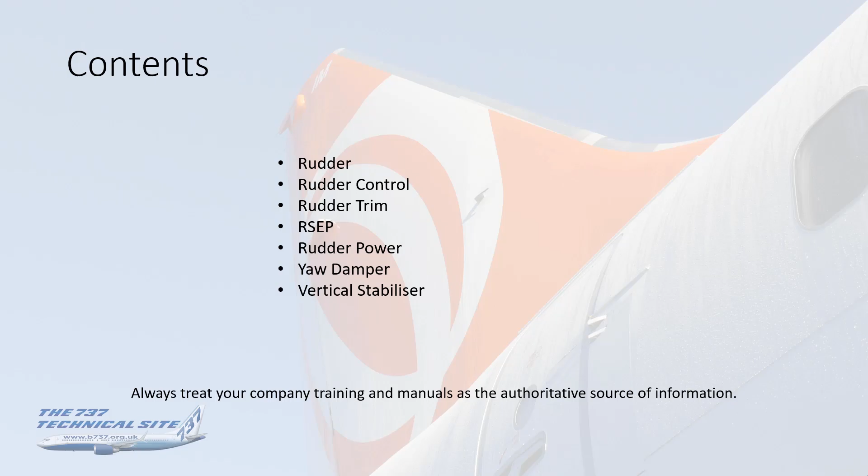Starting with the rudder. It's got a maximum physical deflection of 29 degrees left or right of centre. It was only 26 degrees on the Classics, but it was increased slightly for the NG, as it was envisioned, and in fact it happened, that the aircraft were going to be made with a longer fuselage length, the 8 and 900.

So the extra rudder deflection was sort of future-proofed in for them. Although that maximum deflection is 29 degrees, the total authority of the rudder is reduced with indicated airspeed due to something called blowdown, meaning although a constant hydraulic pressure is applied to the surface by the actuator. The movement of the panel reduces with speed as the dynamic pressure on it increases. For Classics, which are the only generation I've got data for, but it's very similar to the NG and the Max I'm sure, the figures for total travel are as given there.

Whilst the aircraft's stationary, it's the full 26 degrees. At 150 knots, it reduces to 19 degrees. At 250 knots, 8, and at VMO 340 knots, it's down to just 4 degrees.

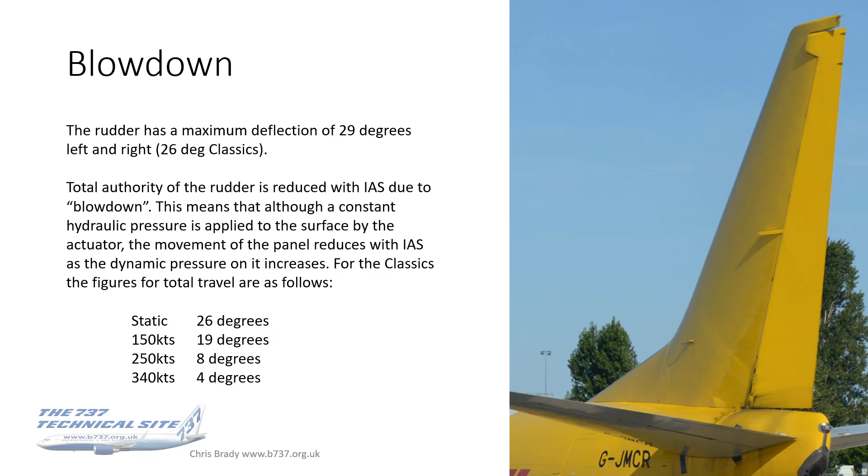Tabs. I've put this in - it's not really a trick. It's more to make the point that unlike the ailerons and elevator, the rudder does not have any balance or servo tabs, because it is, or at least always should be, always hydraulically powered due to the level of hydraulic redundancy on the rudder system. For the same reason, there is no manual reversion in the cable and direct linkage sense of the word for the rudder.

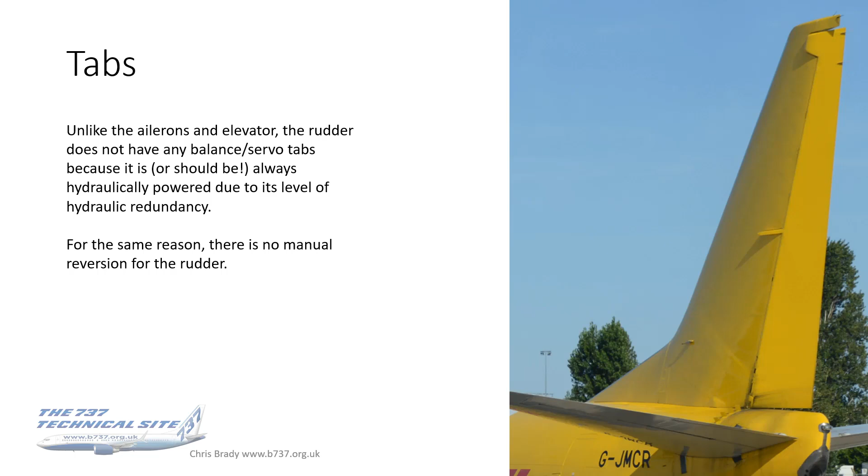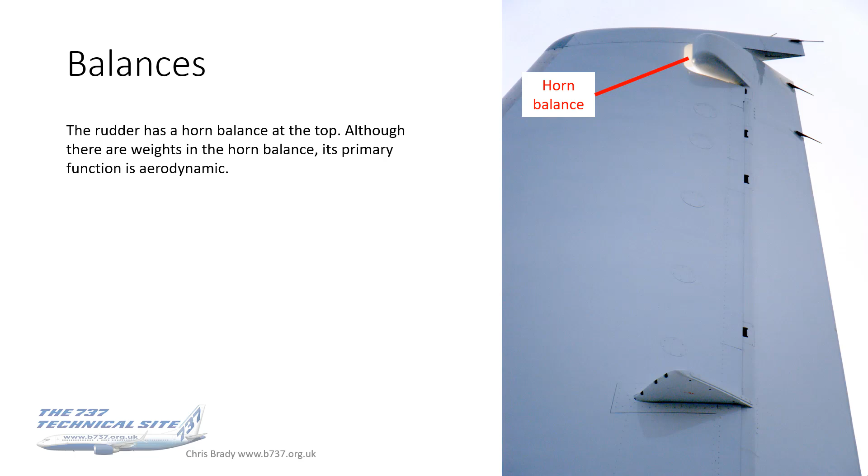So looking toward the top of the rudder here, let's have a look at the balancers. The balance on the top is a horn balance, and although there are weights in that, its primary function is aerodynamic, so the shape of that assists with the deflection of the rudder. But the rudder's also got mass balancers forward of the hinge line, and you can see one down near the bottom of the photograph.

The weights in the mass balancers are made of tungsten, not depleted uranium. That was something that was used by Boeing, most notably in the very early 747s, because of its density. That was quickly swapped out for tungsten, which is almost as dense, but without the radioactive side effects.

The weights in the mass balance are adjustable for rebalancing, unlike the weights in the horn balance, which are permanently set as they come out of the factory. The reason why rebalancing may be required is after a repair or a repaint, not only of the rudder but any primary flight control, and that's to prevent flutter or any dynamic instability.

Hopefully the reason will just be a repaint rather than damage, but it could be for either. Most of the time rebalancing isn't required - it depends on the actual paint job, or the nature of the repair on the surface, and the engineers will do a calculation to verify that rebalancing with weights is not required. The last thing to say is those little holes visible at the front of the mass balancers are just drain holes, to let the water out.

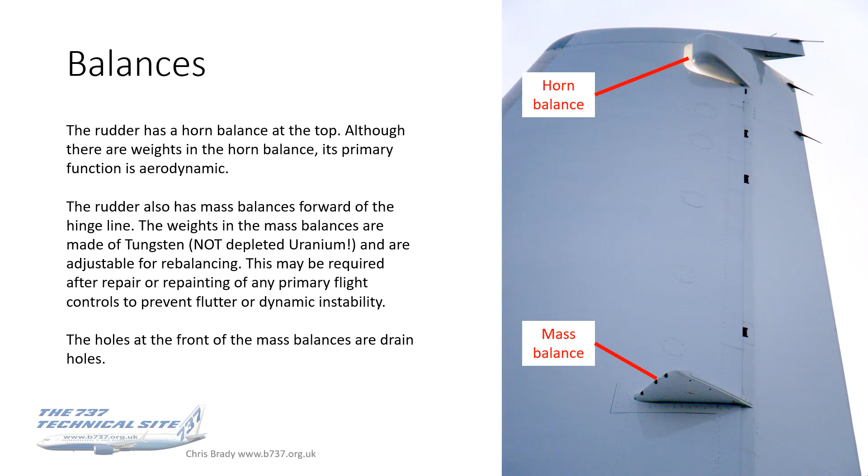One other thing about mass balancers is on the 737-1 and 200 series, they can actually be used to age the aircraft. The first 737s off the line had three mass balancers, as you can see in the right-hand photo there. That was until 1970 when they dropped down to two mass balancers, which apparently saved 40 pounds in weight.

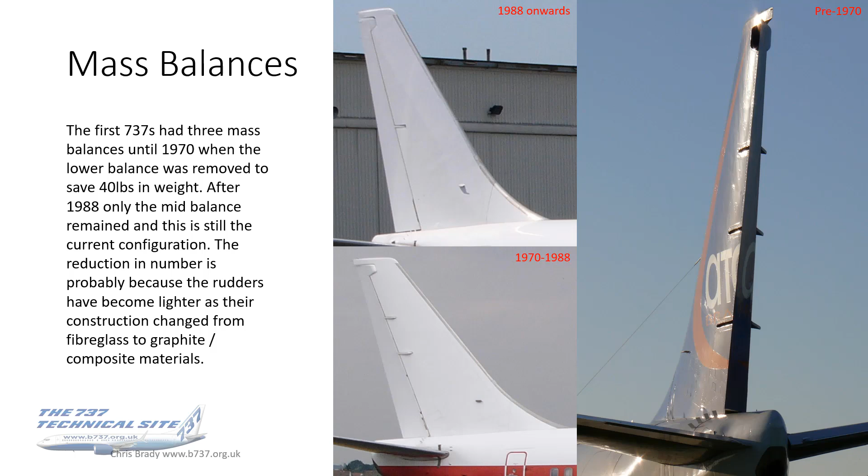And then in 1988, they managed to eliminate the upper mass balance as well, just leaving one mass balance in the centre of the rudder. That's still the current configuration in all 737s today, right the way through to the MAX. So all the evolution was done in the 1 and 200 series. The reduction in number of mass balances was probably because rudders have become lighter as the construction changed from fiberglass to graphite and composite materials.

On to rudder control. There's quite a complex photograph there on the right, I'll come back to that in a minute. Let me explain what we mean by rudder control. The rudder is hydraulically powered by PCUs located in the vertical stabiliser in the tail. But the inputs come from us in the front via the rudder pedals. So that input has to get from the rudder pedals at the nose of the aircraft, all the way through the length of the aircraft, up the fin to the PCUs. How is that achieved? Well, in true Boeing style, it's done with push rods, cables, quadrants, and other suitable mechanical devices.

Onto the photo. This photo is taken under the flight deck floor, in particular under the FO seat, and the top of the photo is looking forward toward the nose cone. If I put some labels on it, it might help a little, because I agree this is quite a difficult photo to work out, but it was the best I could do.

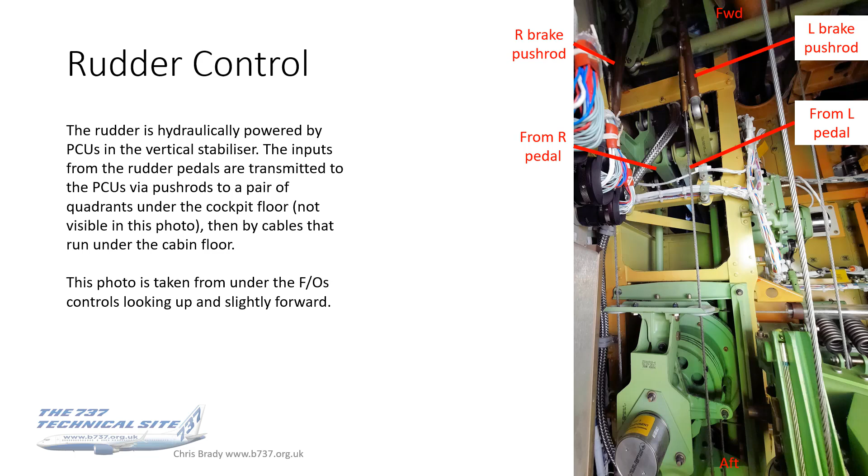The two rods going forwards from those pedal linkages are actually the brake push rods, because these are from the toe brakes. When you push forward on the rudder pedals, they're the connections that go through to the braking system. I could have included that photo in the landing gear video, but anyway, there it is. You've seen it now.

So returning to the rudder, these are the push rods for rudder control. They are travelling aft from the left and right rudder pedals, so there's a push rod from each. You can't see the one from the right pedal particularly well, but the left one you can see more of the length of it.

Just to show you some other things while we've got the photo up, that silver braided cable that runs almost the full length of the photo is the rudder pedal adjustment flex shaft. When you're adjusting the length of the rudder pedals with that knob just above them, that's where that runs, but from behind that adjustment knob. The other thing I should mention is that large cylindrical unit at the bottom of the photograph - that's actually the base, the underside of the first officer's control column. So there you go, that's a kind of overview of what lies beneath the flight deck floor.

The takeaway point from this is that from the left and right pedals, you've got a push rod from each that goes back, and they will meet a quadrant. On the quadrant is where the start of a cable run occurs, and it's the cables that travel the length of the aircraft, not push rods.

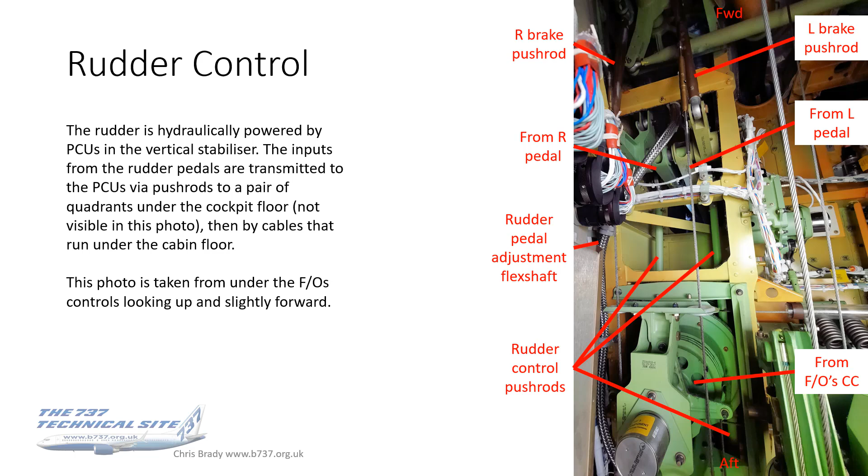So this photo, again, was actually taken on a Classic, but it's exactly the same on the NG and the Max. This shows a section of the cabin floor taken up, and you can see that there are, in this photo, actually 5 pairs. There are 10 cables visible, and I can tell you, if more sections of the floorboards further outboard were taken up, there would be even more cables.

Anyway, the rudder cables, the ones that we're interested in, they're actually the inner 2. I know this because when I was taking the photo, I had my colleague in the flight deck, and I had him moving all the flight controls while I was holding these cables to try and identify which did what. It was actually a longer job than it should have been, but I promise you, those inner 2 are the rudder pedal cables, and they travel all the way down the fuselage, then travel back to be behind the aft pressure bulkhead, where they turn upwards into the vertical stab up to the PCUs.

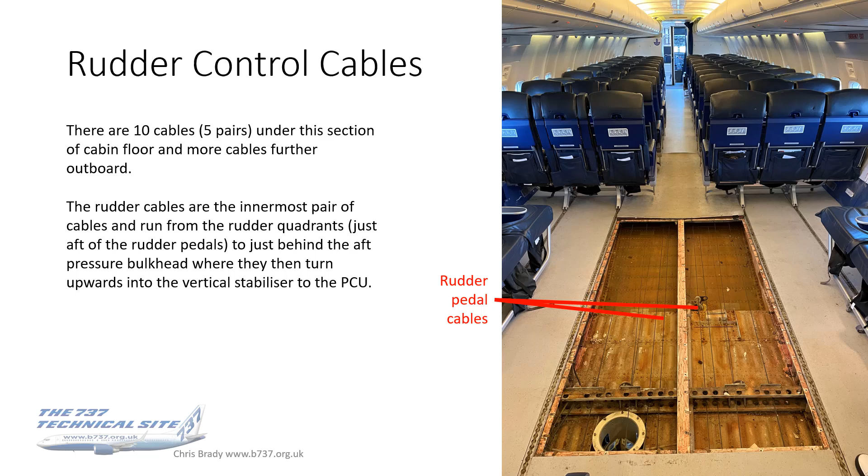Anyway, I have some more photos to show you of this journey. This is the absolute back part of the cabin floor, and at the top of the photograph you can just see the start of the rear pressure bulkhead. So there's nowhere further you can go back on the plane in the cabin than here. I agree it's difficult to see in the photos, but hopefully you can just about see that there are actually 4 cables visible in this, and the inner 2 again are the rudder control cables.

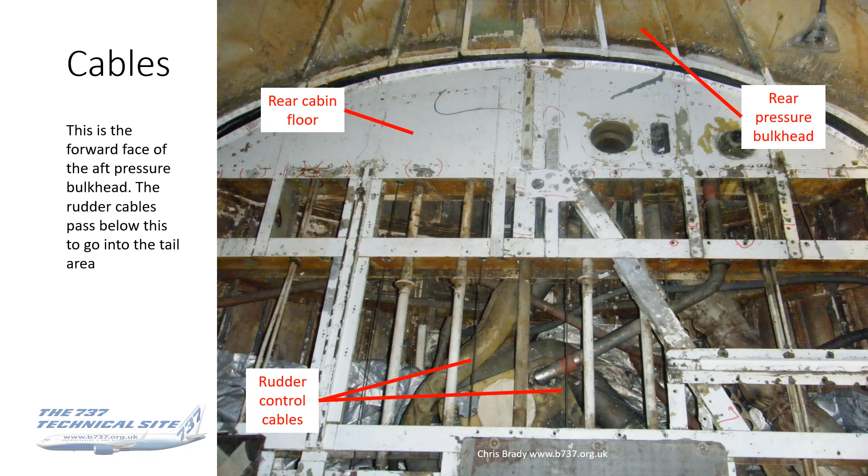So the other side of the bulkhead looks like that, which I think is a great photo. To me, this looks like the bottom end of a Saturn V rocket, but it is sadly only the back of the aft pressure bulkhead on a 737.

Now you can see there are 2 cables travelling vertically up. They're the 2 that we saw in the previous photo, and they're turned upwards by a pair of pulleys. They then go up along the back of the aft pressure bulkhead, and you can see 2 more pulleys which just turn them off at about 30 degrees, just to follow the inside route up the vertical stab.

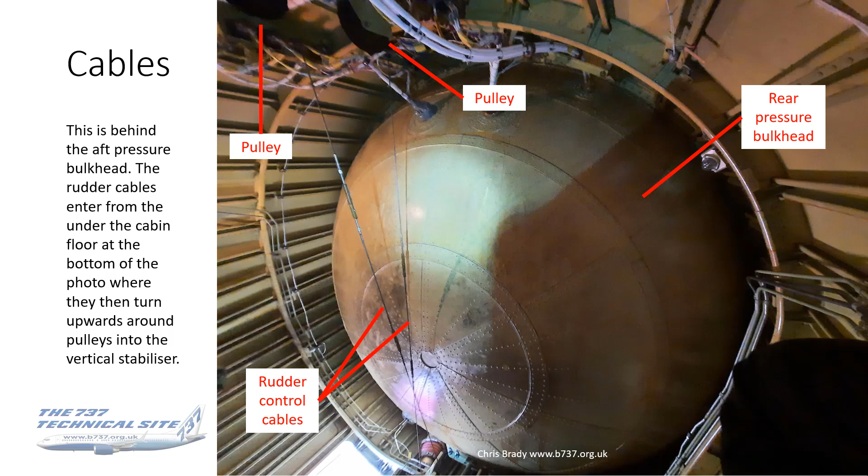And then this is a view of the side of the fin. The forward is looking to the left of the photo. So if I take you through the labelling of these items from left to right, that's probably most logical. On the left, you can see I've labelled the cables from the rudder pedals. These are travelling up from behind that aft pressure bulkhead, as we saw in the previous photo. They then turn a corner and travel down toward the centre of the stab, where they meet the aft rudder quadrant.

So the forward rudder quadrant was just a couple of foot behind the rudder pedals, and these cables terminate at the aft rudder quadrant. Now also attached to the other side of the quadrant are 2 more control rods. These are output rods, and they marry with, or go into, the feel and centering unit, which is connected to the torque tube, and the torque tube rotates and gives the inputs via another pair of control rods to the standby main PCUs.

So really, from the feel and centering unit, the torque tube, and the PCUs, it's actually very, very similar to the system that I showed you on the previous video with the ailerons. It's unfortunately just not anything like as easy for me to show you the photos of how it works behind the panels with the rudder, because it's so inaccessible. As you can tell by the quality of this photo, I took this 10-15 years ago from a distance, and it's the best photo I have in my library. But the function of that feel and centering unit, the torque tube, and the PCUs is just the same as you saw me able to show you in the wheel well for the aileron system.

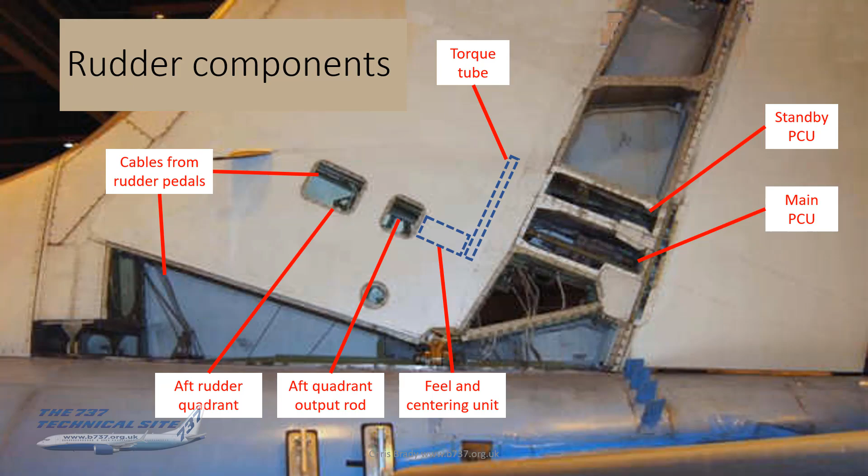This is the only decent photo I've ever managed to take of the PCU. It's the other side, unfortunately, so it's the less interesting side. If a PCU can ever be described as having an interesting or least interesting side, but there you go. So it's the side without the control rod inputs, unfortunately.

But what you can see on this side, up at the right of the photo, are the 4 hydraulic lines - your hydraulics A and B flow and return lines, which confirms that this is the main rudder PCU and not the standby rudder PCU, because the standby rudder PCU has just got a standby hydraulic system feed, so it would only have two feed lines, or 1 flow and return. The actual main housing of the PCU is there in the middle, and you can just about see on the left hand side the piston rod which is attached to the rudder, which is just out of shot to the left of the picture.

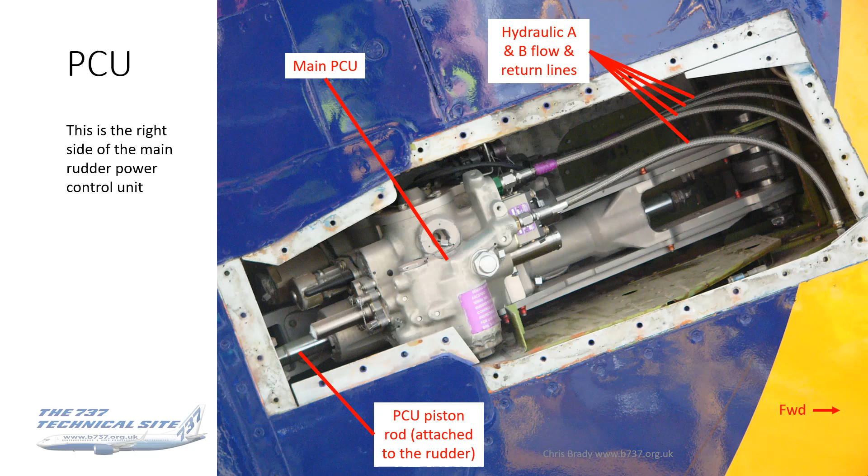Okay, on to rudder trim. Now, if we go back to the photo I showed you a couple of slides ago, this is probably the best way to visualize it. Now, the rudder trim sends an electrical signal to the rudder trim actuator, so it's not done by cables at all - it's an electrical wire. That moves the rudder trim actuator.

Again, it's virtually identical to the same rudder trim actuator that you saw in the wheel well, where you saw it in action in the video I did, where it moves and biases the feel and centering unit. In doing that it's connected to and turns the torque tube, which puts an input into the rudder PCUs, which moves the rudder. So that's how that works.

Now the other thing is, because the feel and centering unit is also connected by the control rods to the aft rudder quadrant, and in turn the cables, and in turn the rudder pedals, this actually back drives the rudder pedals through the rudder cable system. That is why when you move the rudder trim knob, the rudder pedals move. It all happens from there.

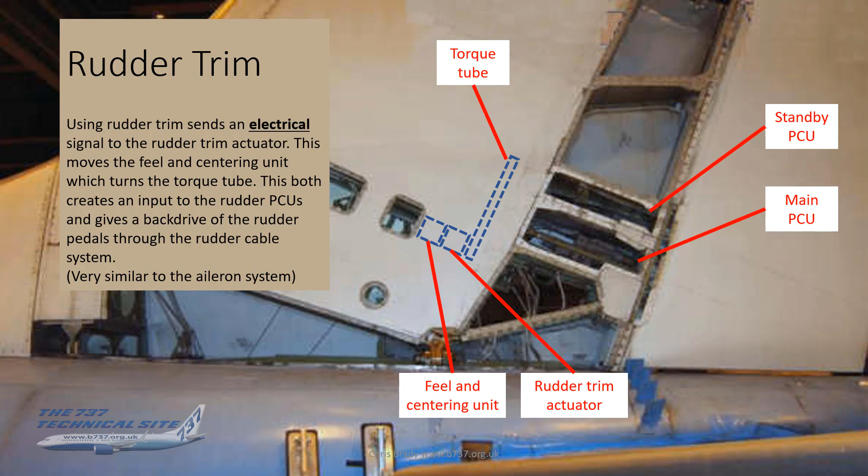So there we go, I hope that explains it. I apologize once again that the photos aren't the best, but it's a minor miracle I've managed to accumulate these photos in my career. But there you go, you can see it there.

Another word on rudder trim. It's perhaps worth remembering that because the rudder trim takes an electrical path to the PCU, if a rudder control cable were to break in flight - and I have to say I don't know of this ever happening, Boeing might but I certainly don't - rudder control would still be available with rudder trim. So it could be worth keeping that little nugget of information in the memory banks.

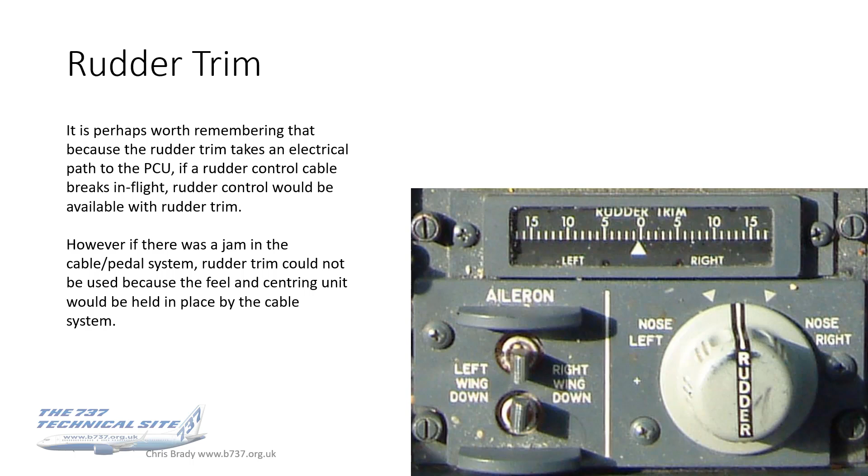However, if there's a jam in the cable or pedal system, then rudder trim couldn't be used, because the feel and centering unit would be held in place by the cable and rod system. So this sort of get-out-of-jail-free card will only work if a cable is broken. Hopefully you'll never need to use that information, but there it is.

Now this, for those of you who've not seen it, I promise you this is a photograph from a 737. It's how the rudder trim and aileron trim looked on the 1 and 200 series. They are enormous knobs.

They are lifted straight from the 727, from an era when there was much more hand flying and asymmetric thrust, before the days of autothrottle. I ought to explain that on the 737-1 and 200 there was no autothrottle. In actual fact there was a retrofit option, but very few 200s ever had it. And of course asymmetric thrust, even a minor amount, can lead to a necessity for trimming.

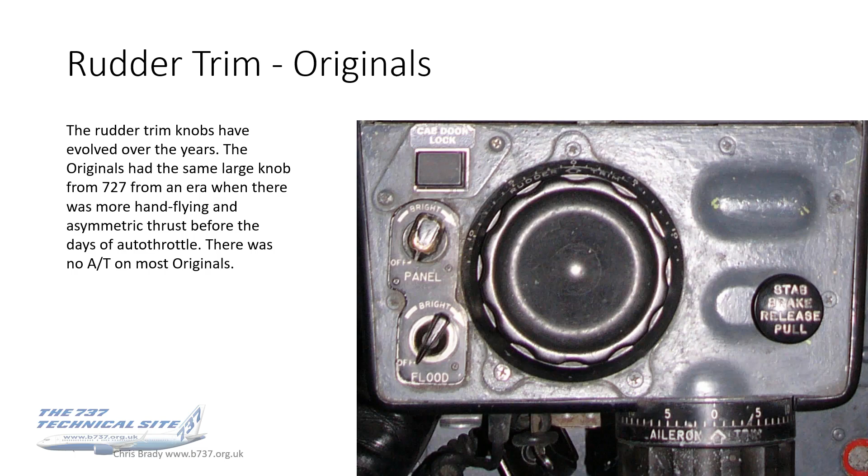Anyway, winding the clock forward a couple of decades to the 80s, the classics were born - the 3, 4, 500 series - and they originally came off the production line with this blade-shaped knob. In actual fact it's not a blade, it's supposed to represent the rudder, in keeping with controls looking like the surface they are intended to move.

If you think of the gear lever, it's got a wheel on the end. The flap lever's got a sort of flap cross-section on the top. The landing lights have got sort of lights marked in there. So that was the logic - Boeing were just being logical by making a rudder-shaped knob.

But this had to change in 1990 to the present round sort of fluted knob that we know and is still in production with the Max today, following the crash of a US Air 737-400 which overran at LaGuardia with full left rudder trim set. Now the accident report - if you want, you can just Google that reference there to read it for yourselves.

To summarise it for you, on that flight there was a jump seat occupant, a deadheading crew member actually, and it is believed that the jump seat occupant inadvertently moved the knob when he placed his foot on the panel there. Now according to the report, the jump seat occupant denies doing this, and it was noted that the FO put something down on the aft electronic panel, and the FO denies doing that.

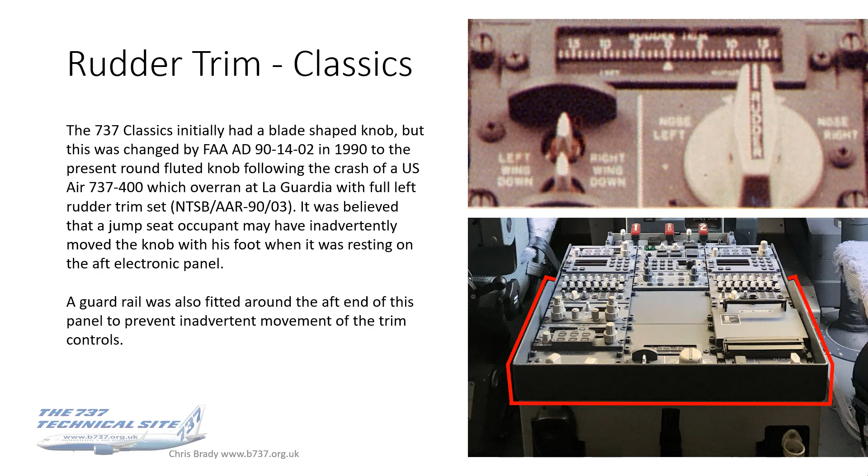Now, that's not to say there haven't been rudder trim runaways since, and I know because I've had one. Page 29 of the report that I referenced on the previous slide states that many pilots reported rudder trim knobs sticking out of neutral after intentional activation. A knob with debris underneath, or a mechanical anomaly found later on some aircraft, can keep driving trim after release, in spite of it being spring-loaded to the neutral position.

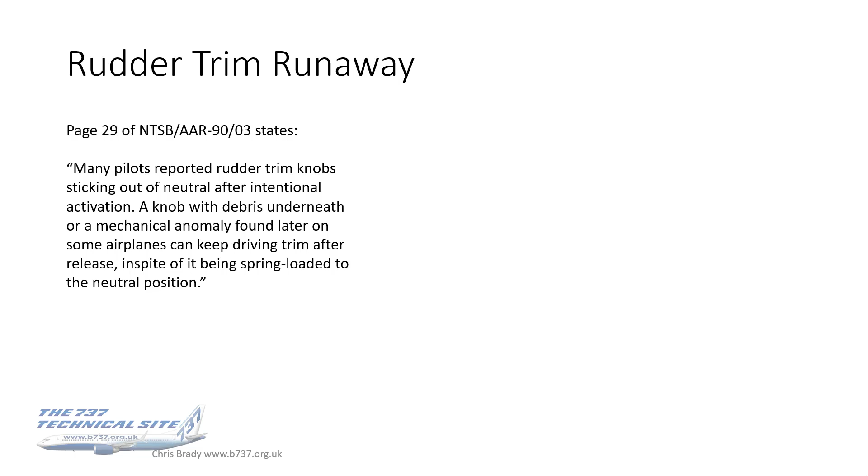And this is exactly what happened to me back in 2006. I was about to take an aircraft up on a maintenance check flight after it had been in heavy maintenance for a month or so. It was also a customer demonstration flight for end of lease, as the aircraft was being handed back.

Now, fortunately, before I do these flights, I do quite an extended lot of pre-flight checks and of course in-flight checks. But as part of those pre-flight checks, I always exercise to the full extent all of the trim.

You know, rudder, aileron, stab trim. Now, when I was safely on the ground, thank goodness, I got to the point in my checks where I moved the rudder trim. Instead of spring loading back to the neutral position after I released it, it stuck in the full travel position, full left, and it just drove the rudder trim all the way to the full extent, which horrified me. I moved it back to centre and tried it again in the other direction, and the same thing happened.

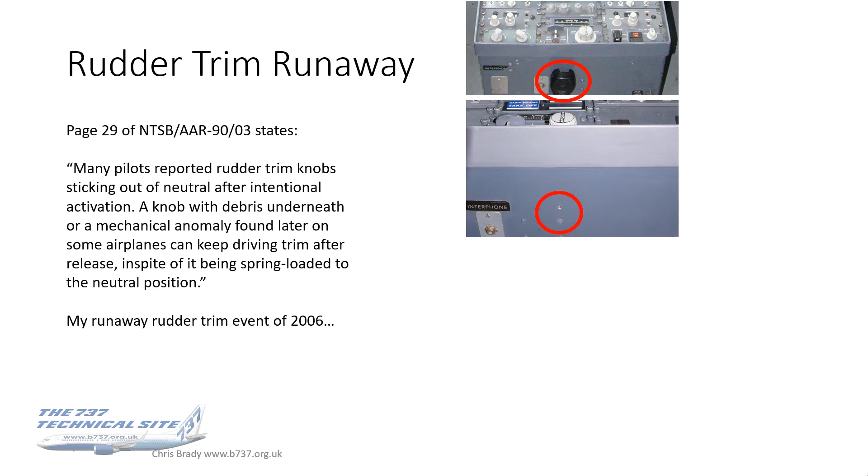Now, when the rudder trim unit was taken out in the subsequent investigation, this is what was found. The 2 screws that had been used to hold the bracket that holds the microphone in place had been taken out, the bracket removed, and the 2 nuts and bolts had been replaced. Because they'd been replaced and the bracket hadn't been replaced, they were a fraction longer than they had been before, about 1/4 to 1/2 centimetre, I believe. And this is the result.

That there is the unit which has come out of that bottom photo, and you can see that there is a large bolt-shaped dent on the rudder trim housing. So what had happened is that the bolt had pushed that forward in its housing. It had pivoted around the light plate at the top, which was pushing the knob backwards. And because the knob, as you can see, has got a fairly wide brim to the bottom of it, it was binding on the panel itself.

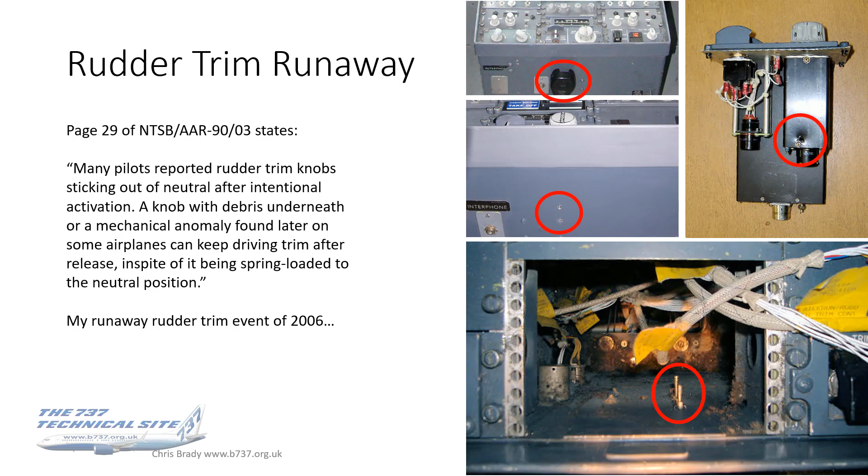Okay, on to more regular stuff. The rudder trim limits. Now, I've written what you'll sometimes find is that, but in my experience, what you'll almost always find is that a particular aircraft requires an adjustment of the rudder trim in the climb or the descent. Now, there are 2 reasons for this. The first is that an out of trim condition arises due to the different thermal expansion rates in the components as the aircraft cools in the climb and heats up during the descent.

This is undeniably at least partially true. The second reason, and I don't know how much it's one and how much it's the other, but the second reason is that whatever slight out of trim condition there may be on the ground, it will be magnified at a higher indicated airspeed, as the v squared laws kick in. And this, of course, changes during the climb and descent.

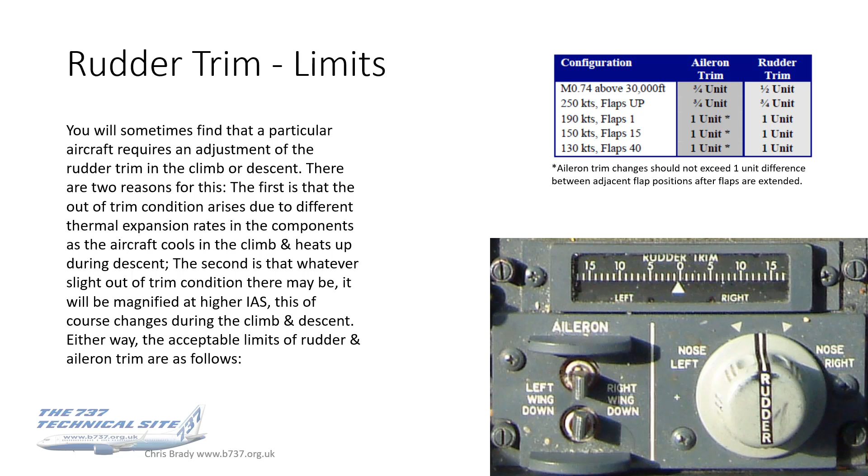All right, last horror story about rudder trim, and this event didn't happen to me, but it was quite famous at the time. In 2011, a 737-700 belonging to a Japanese airline entered a roll that reached 131.7 degrees when, according to the report, during the flight the FO erroneously operated the rudder trim control while having an intention of operating the switch for the door lock control in order to let the captain re-enter the cockpit.

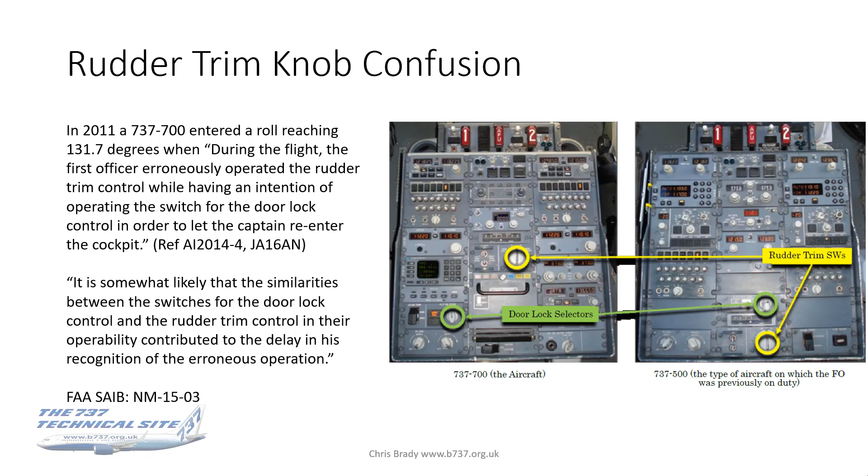So that's what the SAIB is driving at, is basically keep things in a standard place, which of course we as pilots have known for almost 100 years, and which is why the flight instruments are always kept in the same sequence - the basic 6 - on pretty much every aircraft you jump in and out of, to make things easy for us. Okay, again, I digress. On with the program.

So let's have a look at the RSEP, the Rudder System Enhancement Program. This was huge news when it happened. This really was a series of events which almost led to the grounding of the 737, and really was, if you like, the classic's version of MCAS. There was just as much controversy and angst about it.

Anyway, let me carry on. So from January 2003, all 737s were delivered with the RSEP installed, and by now all 737s should have had this modification.

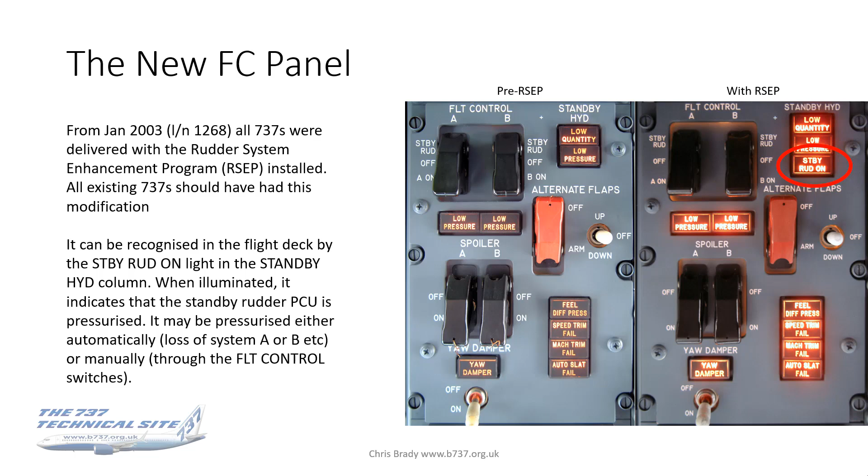We can recognise it in the flight deck by checking that the flight controls panel has got a standby rudder on light. That's the giveaway, as I've indicated on the right hand photo. Now, when this illuminates, it's telling us that the standby rudder PCU is pressurized. Now, it may be pressurized either automatically or manually through use of the flight control switches. And I'll come on to these criteria more in a moment.

But let's look at the background to this. Why was this change made? And as I say, this really was the sort of MCAS of its time.

So 2 737s suffered fatal accidents with huge loss of life during their approaches. In March 1991, United 585, a 737-200 at Colorado Springs, and in September 94, USAir 427, a 300 at Pittsburgh.

Also in 1996, there was a significant, albeit brief, yaw roll upset to an Eastwind 737-200 whilst approaching Richmond. Now, the reports are out there on the internet for you to read and digest if you wish. I will probably at some point dedicate a whole video to this story, because it is quite a useful one to be familiar with. But over the next couple of slides, I'm going to give you the executive summary.

If I can condense some of the opposing parties into 3 brief sentences, it goes like this. The NTSB said that a rudder reversal scenario will match all 3 events. Boeing took a different view, and said there is no physical evidence that supports rudder reversal scenarios in the 3 incidents. Which actually they're correct, because the physical evidence kind of disappeared, or at least was elusive. The FAA stood in the middle of all this as the arbiter and lawmaker, and said that no one will ever know the cause with any certainty, so they're focused on making the plane safer. So good for them.

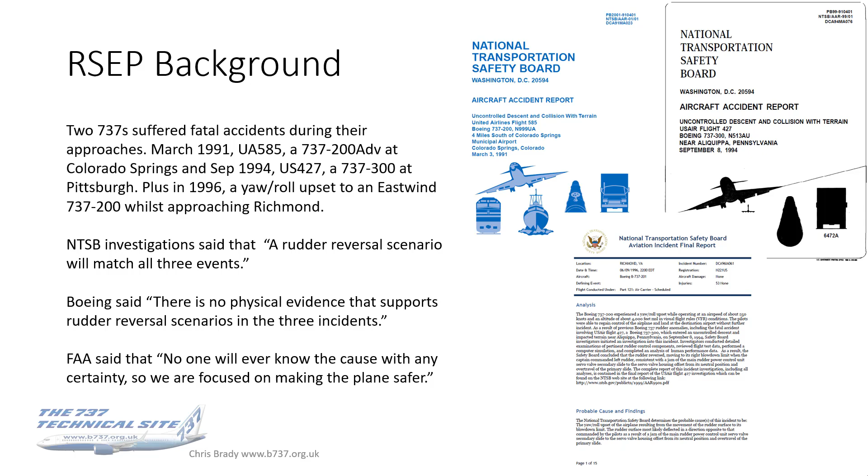The NTSB stated that their findings were consistent with a rudder reversal most likely caused by a jam of the main rudder PCU servo valve secondary slide, that's the middle one of the 3, to the servo valve housing when it was offset from its neutral position and over travel of the primary slide. So the whole thing completely malfunctioned, and it led to a rudder reversal, which must have been incredibly difficult for the crew to deal with. Well, I say that, but of course 2 aircraft were lost.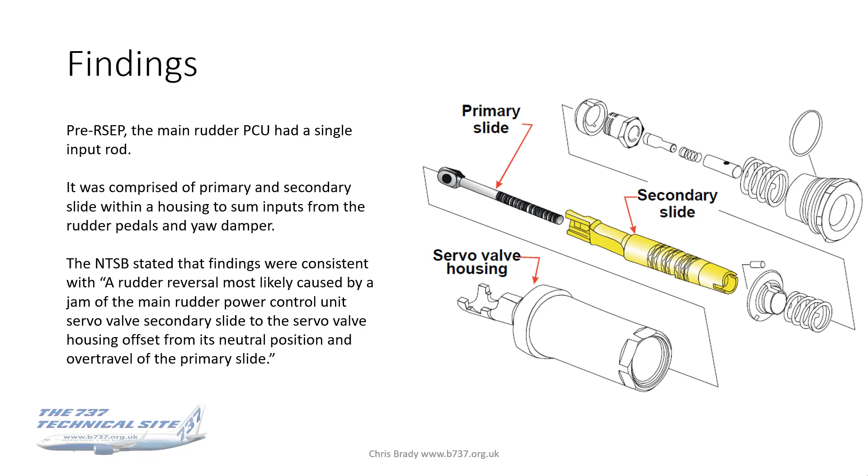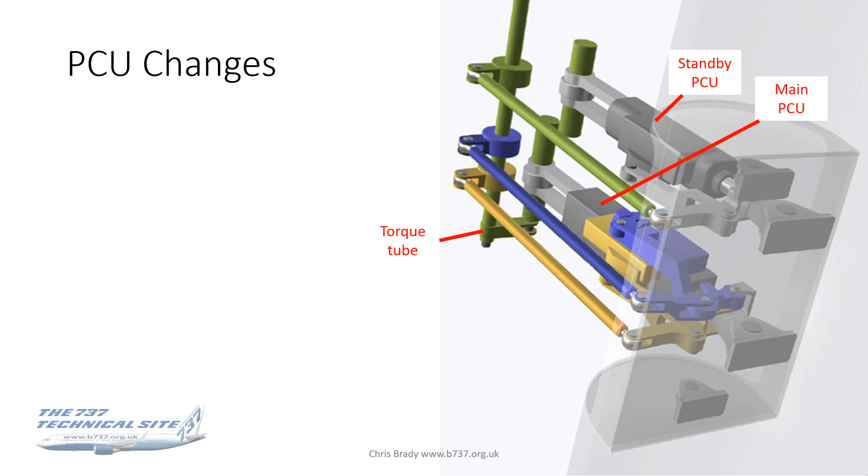Now, the dual concentric servo valve, the old one on the previous slide that was very complicated, was replaced by independent input valves with separate input rods. One for hydraulic system A, which is the upper one shown in blue, and the other for hydraulic system B, which is the lower one, shown in yellow. So the concentric rod arrangement was swapped out for independent rods.

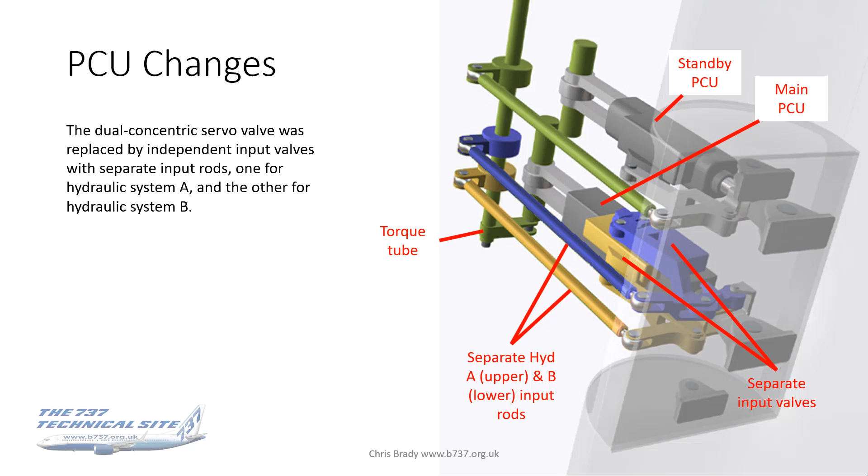Not only that, all 3 input rods, even the standby input rod which was never affected, now have individual jam override devices, attached to the input shaft, that allow the rudder pedal inputs to be transferred to the remaining rods if a jam occurs. These are spring-loaded roller and cam devices mounted to the torque tube, with a breakout load of 18 pounds at the rudder pedals, so it's quite low. When you think aileron breakout loads are around 90 pounds, this is low, and it needs to be low because the rudder is so powerful.

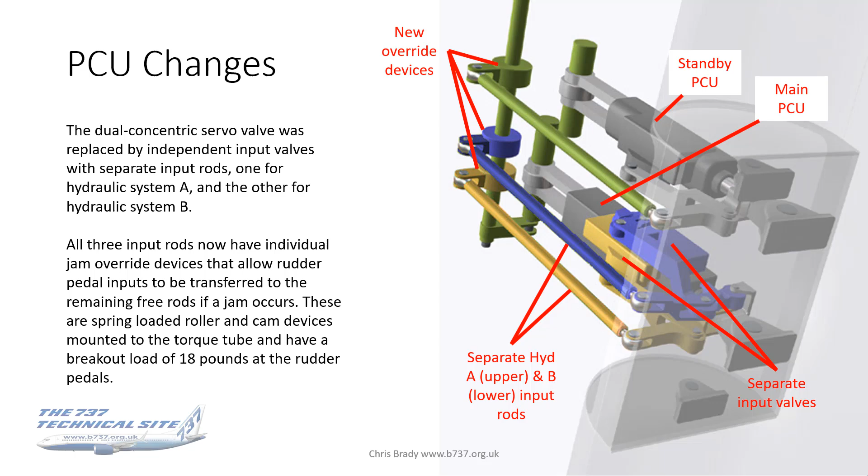Additionally, a component called a force fight monitor was added to the main rudder PCU, and this detects an opposing pressure, a force fight between the A and B actuators. So it doesn't detect a difference in pressure. If system A is giving 2000 psi and system B is giving 3000 psi, it doesn't detect that. What it detects is an opposing pressure if one is forcing against the other, as might happen in a potential rudder reversal or any other hydraulic system input rod or control valve jam or failure, no matter how unlikely.

If an opposing pressure is detected by the force fight monitor for more than 5 seconds, it will automatically kill the hydraulic power on A and B and open the standby rudder shut-off valve and energize the standby rudder PCU, which will bring on the standby rudder on light. So it's protecting against this sort of unlikely scenario.

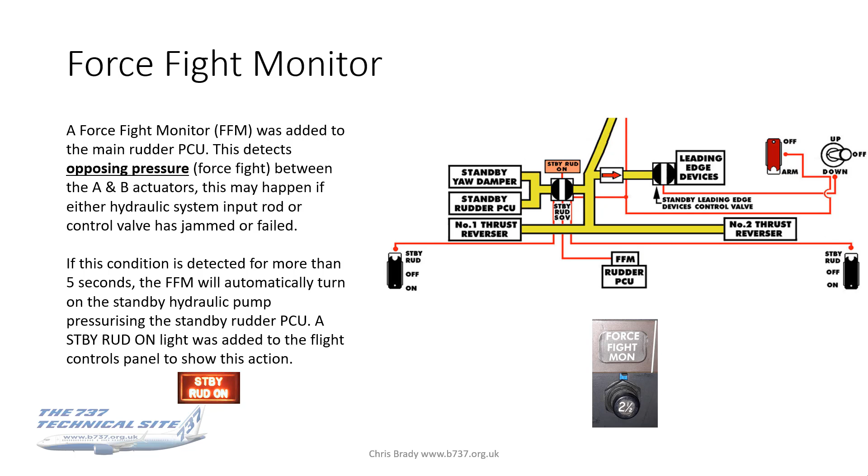Furthermore, they were installed, and I'm just going to cover the originals and classics in this slide. I'll come on to the NG and the Max, which has got a slightly different system. Not very different, but just slightly.

As part of the RSEP program, there was a rudder pressure reducer and a rudder pressure limiter fitted to reduce the hydraulic pressures, dropping them down to about 1000 psi on the A side and 2200 on the B side, above 1000 feet AGL.

The reason this was done above 1000 feet AGL, not below it, was for the engine out case, where after an engine failure on takeoff, you would want full rudder pressure available. So it's a balance of risk that's why this 1,000-foot AGL limit was put in.

Anyway, the reduced rudder deflection was to permit more effective aileron spoiler control in countering rudder inputs. So what they're saying is that by reducing the hydraulic pressure, the rudder won't be able to deflect as much, so you're more likely to be able to overpower it with aileron and spoiler, and that reduced rudder pressure will give more time to recover from a full rudder input, regardless of the cause.

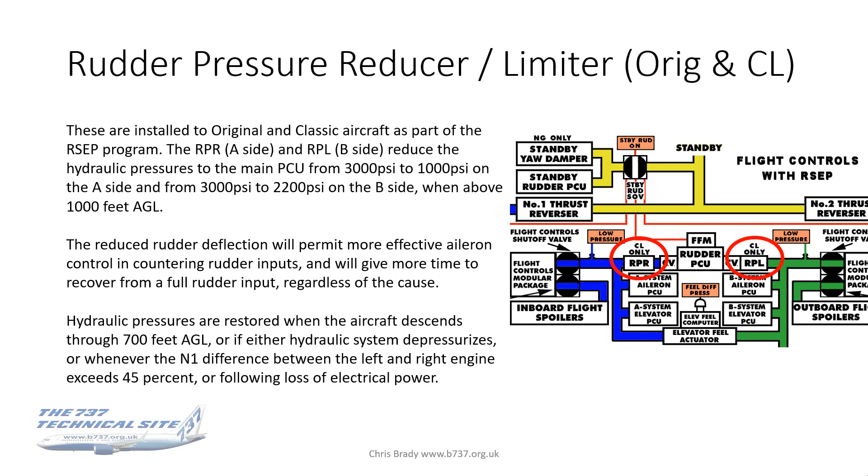So the takeaways are that for the classics, the rudder deflection is reduced above 1,000 feet. Now on the NG and the Max, I'll come back to the photo in a moment. The difference really is that, well, it's got a different name - it's called the Rudder Authority Limiter. The function is pretty similar, and the numbers are slightly different, but on the NG and the Max, it's a function of airspeed, not altitude.

It's airspeed. So when the airspeed is above 137 knots, and it does depend on series - I think it's 136 on the 700 series, and likely more on the Max 10 - it reduces the rudder output force by 25%, which reduces the rudder authority, and this trips back to normal below 132 knots, again, or if a difference in engine speed is detected.

Okay, so onto the photos. I was sort of struggling to find a relevant photo of the rudder authority limiter, because there's nothing to look at. It's just a valve.

So what I've shown here, the upper photo is from a classic that's been retrofitted with the RSEP, as most classics were, and the lower photo is of an NG where the RSEP was installed at build, again, as most of them were.

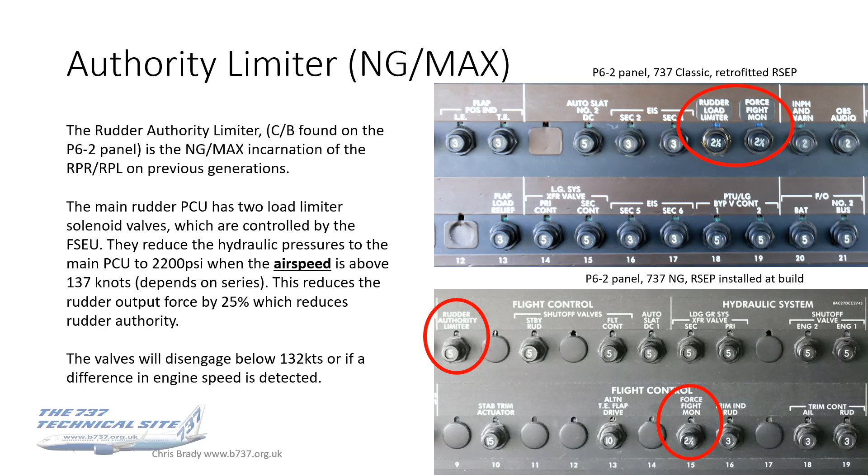All right, on to Rudder Power. So obviously we've already mentioned this earlier, but let's cover it properly. So the rudder is normally controlled by

the main rudder PCU, which is powered by hydraulic system A and or B. We know this, that's in the FCOMs. Under certain conditions, the rudder is moved by a standby rudder PCU, which is powered from the standby hydraulic system. Again, this should be nothing new.

There is no direct cable linkage, manual reversion mode, for the rudder. The manual reversion mode, if you want to call it that, is the standby rudder PCU and the standby hydraulic system. There is no cable linkage directly connecting the rudder with the rudder pedals, unlike the ailerons and the elevators.

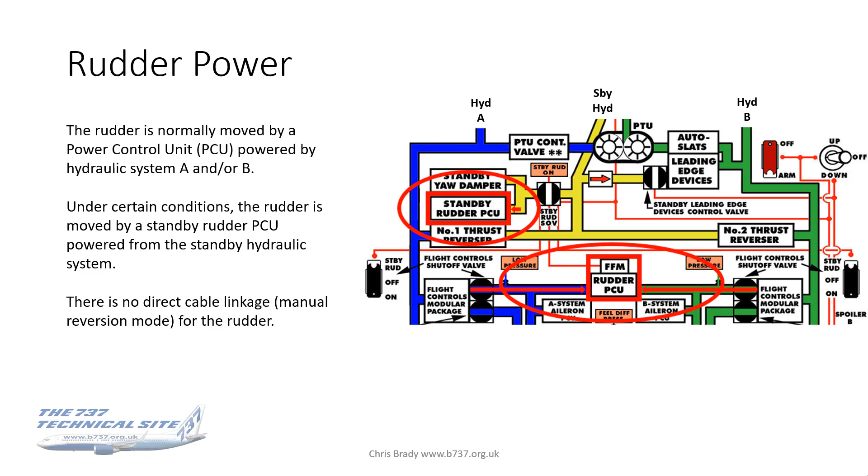Right, now looking at manual standby control, the way you do that is here on the flight controls panel, and you simply move either flight control switch to the standby rudder.

If in flight you were to notice that the flight control A low pressure light illuminated, you'd consult the QRH and it would direct you to move the flight control switch up to standby rudder. Same for B. If both come on, or you've got a loss of A and B hydraulics, you'd move them both to standby rudder.

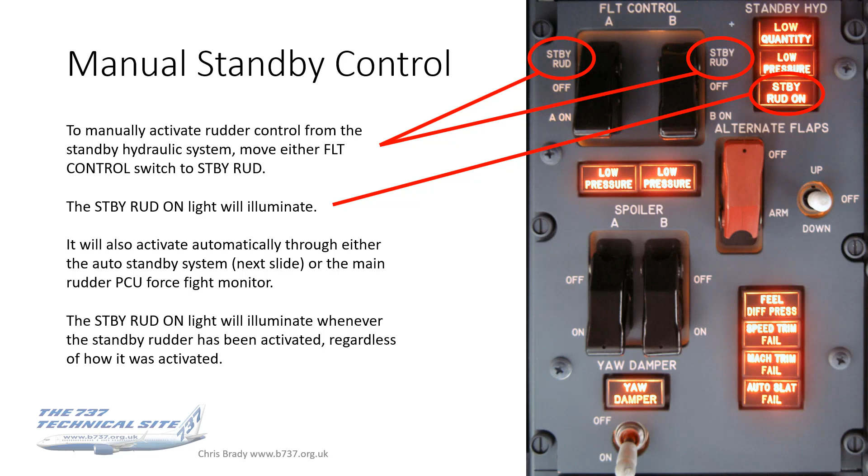The standby rudder will also activate automatically through either the auto standby system, which I'll cover on the next slide, or the main rudder PCU force fight monitor, which we've already mentioned. The standby rudder on light will illuminate whenever the standby rudder has been activated, regardless of how it was activated. So that light is always telling you the same thing, that the standby rudder is on. Easy.

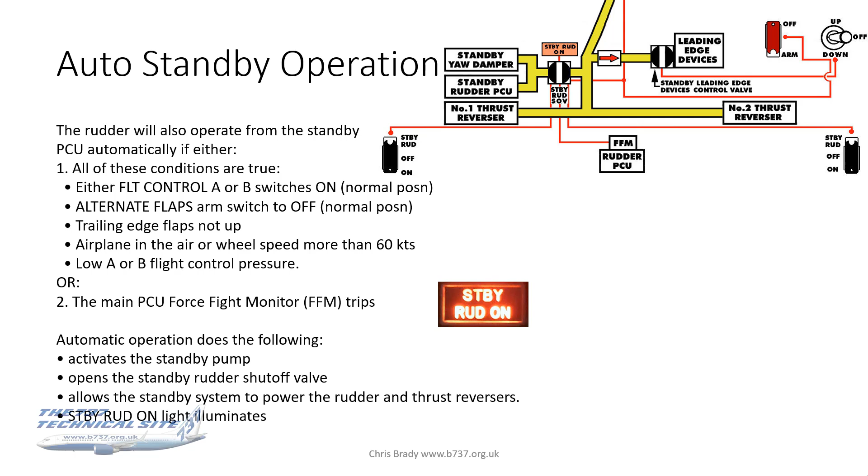For auto standby operation, those of you who saw the hydraulics video should recognize this slide. The rudder will operate from the standby hydraulic PCU automatically if either flight control A or B switches are in the normal position, the alternate flap arm switch is off, trailing edge flaps are not up, your aircraft's in the air more than 60 knots, and you've got a low A or B flight control pressure, or the FFM's tripped. If that happens, it'll activate the standby pump, open the standby rudder shutoff valve, and allow the standby system to power the rudder and thrust reversers.

The standby rudder on light will illuminate, as previously stated. To summarise, if you're airborne and you've got a loss of A or B with the flaps extended, or the FFM activates, standby rudder will come on. That's the takeaway point. That's all you need to know.

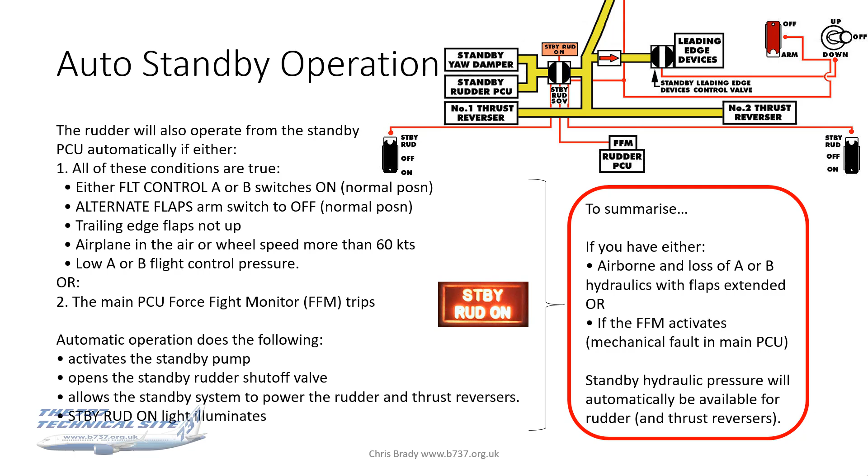Alright, onto the yaw damper.

I've done this on test flights, where under controlled conditions I've put in a gentle rudder doublet to test the function of the yaw damper. With the yaw damper off, we put in a rudder doublet and then switch the yaw damper on to see how many oscillations it takes to eliminate that Dutch roll, and it goes within about 2 cycles with the yaw damper. It's sorted out almost immediately.

For the sake of interest, I have also delayed putting the yaw damper on to get a baseline figure for how naturally stable the aircraft is. When I put the same rudder doublet in, the aircraft had smoothed it out in about 6 cycles, which is really impressive.

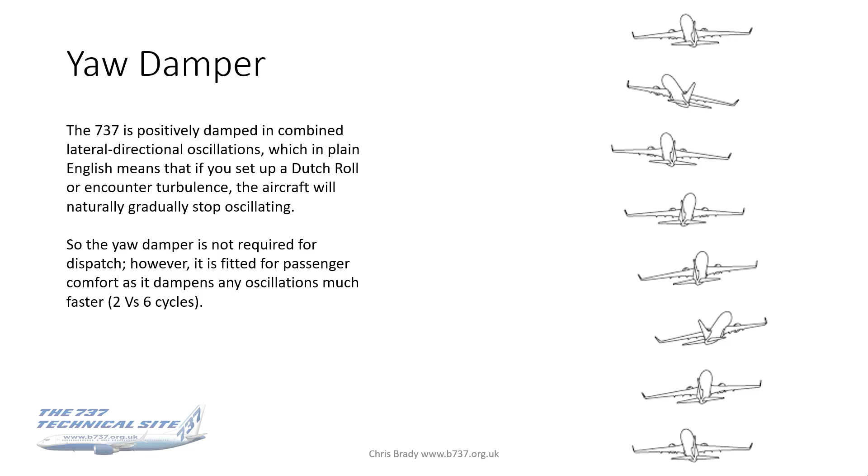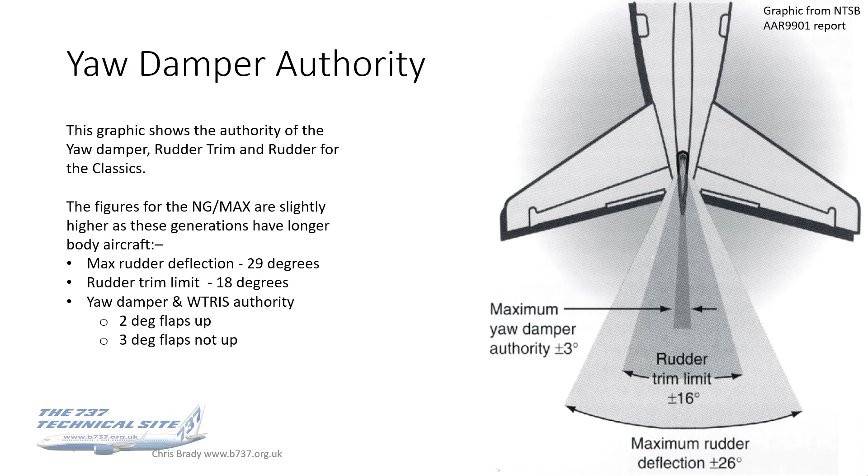The yaw dampers give input into the main or the standby rudder PCUs. Just at the risk of stating the obvious, for those guys who may be new on type or not familiar with the 737, just converting onto it, yaw damper inputs are not fed back into the rudder pedals. This is because the inputs go straight directly into the PCUs.

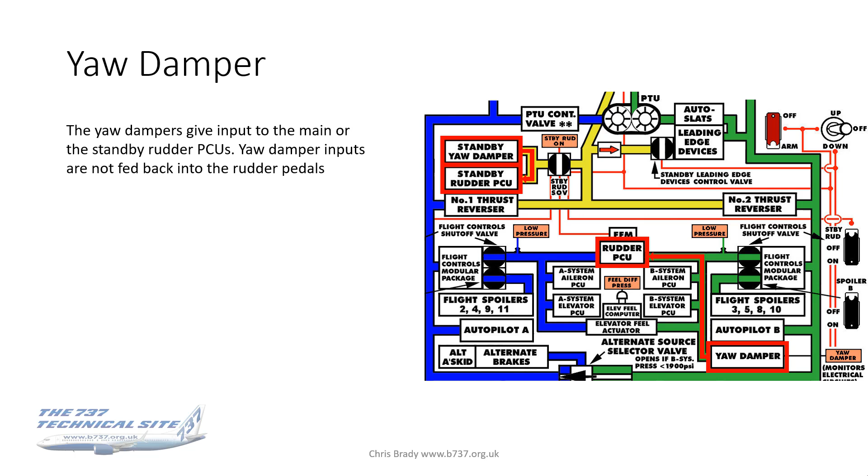During normal operation, SMYD 1 - talking about the NG and the Max here - controls the rudder through the main rudder PCU. I've used the phrase manual reversion because that's how the FCOMs refer to this, but don't confuse manual reversion with raw cable control of the rudder. By manual reversion, what we mean is using the standby hydraulic system. So during manual reversion, SMYD 2 controls the rudder through the standby rudder PCU.

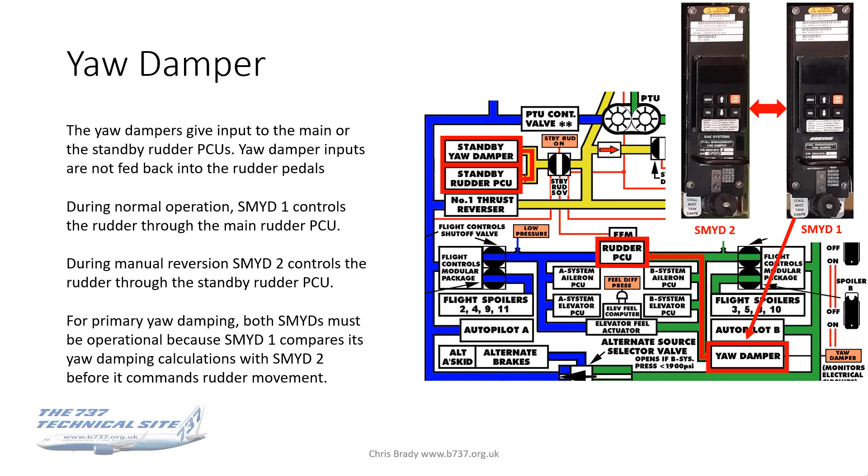Note that for primary yaw damping, both SMYDs must be operational, because SMYD 1 compares the calculations it does for yaw damping with SMYD 2 before it commands rudder movement. So there's a common sense check there, which is great to see because obviously the 737 can sometimes get a bit of a hard press on comparators and things. MCAS didn't do it any favours in that regard, but at least the SMYDs talk to each other and get a common sense check before putting any rudder inputs in.

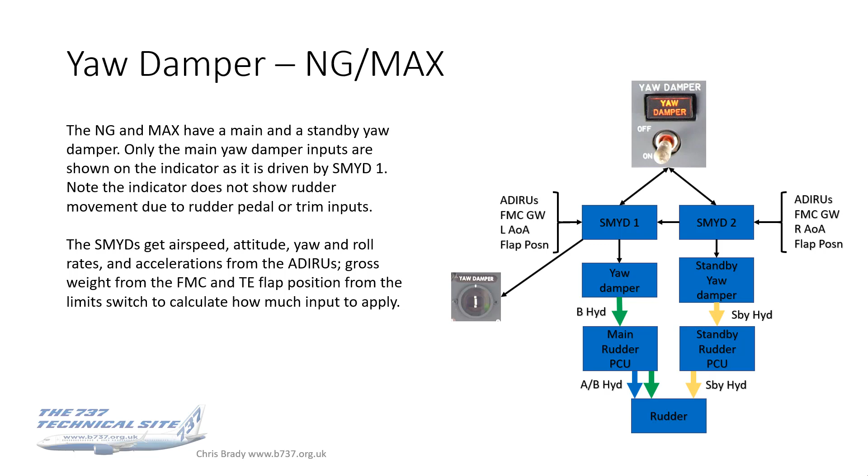Right, the WTRIS, which is perhaps little understood amongst the NG and maybe the Max community. This is the wheel-to-rudder interconnect system, and what this does is it moves the rudder during turns in manual reversion - in other words, when the rudder is being powered by the standby hydraulic system, in response to control wheel inputs. I've done many hours of this for real in the real aircraft. It does feel different, an NG from a classic, in manual reversion in roll. I'm not going to say better.

It just feels different. But what happens is when you move the captain's control wheel in manual reversion, it knows you want to roll and presumes that you want to turn. So the WTRIS function within the SMYD gives you a little bit of rudder to assist that turn. The WTRIS is only active below Mach 0.4, and the gain schedule changes from 0.3, where it's at full gain, dying down to 0.4 - so it dies out between 0.3 and 0.4. The limits for WTRIS and standby yaw damping are 2 degrees flaps up and 2.5 degrees flaps not up, so just slightly less than the main yaw damper.

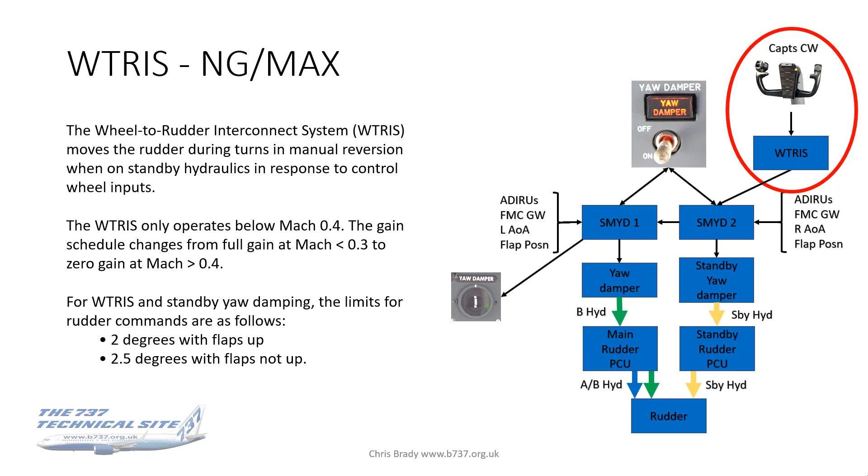A word on the yaw damper indicator. Those of you flying shiny new aircraft will have difficulty locating this because it's been withdrawn. It started to disappear from April 2010, and not only was it withdrawn from all new build aircraft after that date,

but there is a facility for operators to remove it from older aircraft, although why they'd want to do that I'm not quite sure. I guess they'd probably do it if one failed rather than pay to replace it. They would just blank it off, or remove it and blank off the hole. Anyway, a lot of questions were asked by the pilot community at the time as to where's my yaw damper gone, or my yaw damper indicator gone,

because those of us who've flown the earlier generations, the originals and the classics, we're used to checking the yaw damper indicator in turns as we taxi out. It's part of the serviceability checks, part of what you do when you taxi out, and of course you see it moving gently away in flight in a turn, which gives you a confidence check that it's working.

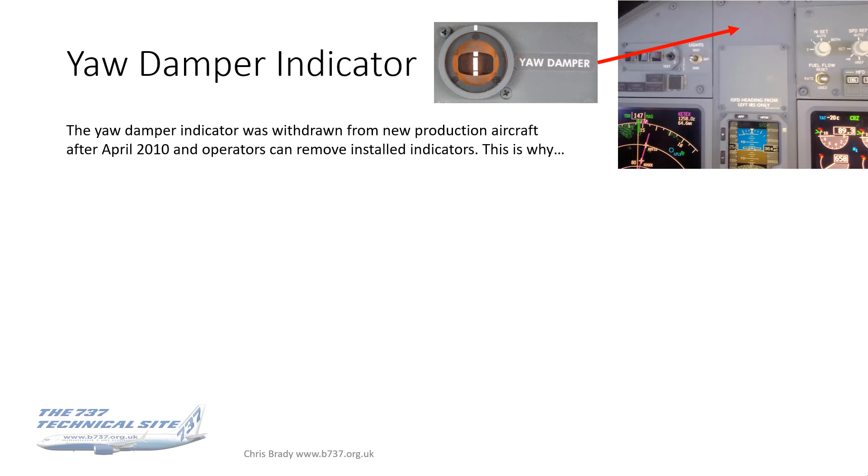Anyway, here's Boeing's reason as to why they removed it. So the story is that pre-NGs, so your originals and your classics, they've got analog yaw dampers, or yaw damper couplers, to give them their full title. And these require crew to periodically check the indicator to verify that it's working, which, like I say, is what we do, most notably during taxi out.

The NG and the Max have got digital yaw dampers within the SMYDs, and these are self-monitoring. So if they malfunction or stop working, they trip off, the yaw damper light illuminates, and that alerts the crew that there's a malfunction and they've tripped off. Boeing have rightly, I suppose, analysed that there are no formal, normal, or non-normal procedures that require the use of the yaw damper indicator.

Again, we're only referring to the NG and the Max here. The classics, you do still have to check it works. And they go on to say that the yaw damper indicator was never needed on the NG, and it was only retained on the flight deck for commonality with earlier generations. Anyway, they obviously had a change of heart and decided to pull it back in 2010. So that's the story behind that.

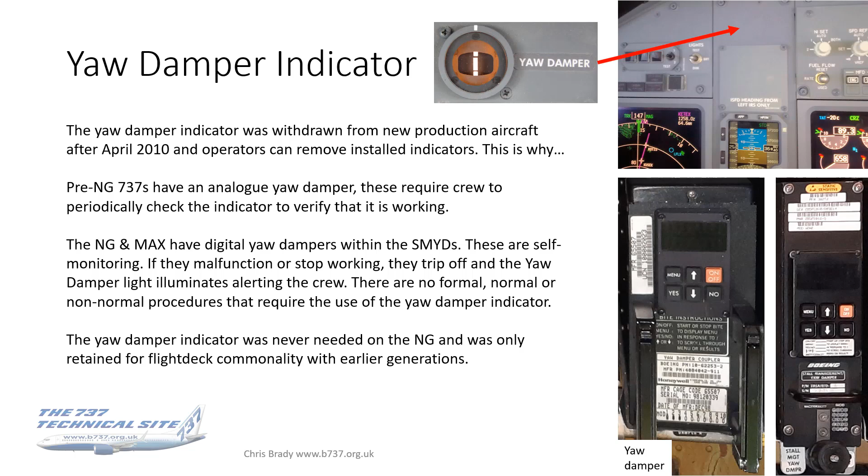We don't need it. It's more there, I guess, as a comfort blanket to those of us that used to fly the earlier generations. The aircraft or the SMYD will self-monitor it much more accurately, efficiently, and quickly than the pilots will, and will switch it off if it malfunctions. So there we go.

On the originals, they also had 2 yaw dampers, but they were actually 2 yaw dampers on the main PCU. It was a dual yaw damper system, unlike what we have on the NG, which is one on the main PCU and one on the standby PCU. This was designed that way because of the experience of the 707 and 727. It was expected that the 737 wouldn't be as naturally positively yaw damped as it is.

I guess they forgot that the 737 was nothing like a swept wing as the 707 and the 727, particularly the 727, because of course the Dutch roll is more of a feature of the swept wing jet. Anyway, so 2 were fitted to allow dispatch in case 1 failed, because these were anticipated to be MEL items, as in no-go items. If they failed you needed 1, so they built the aircraft with 2. However, they quickly also found that the second yaw damper wasn't needed. The aircraft was very benign in Dutch roll, and the second yaw damper was dropped when the classics were introduced.

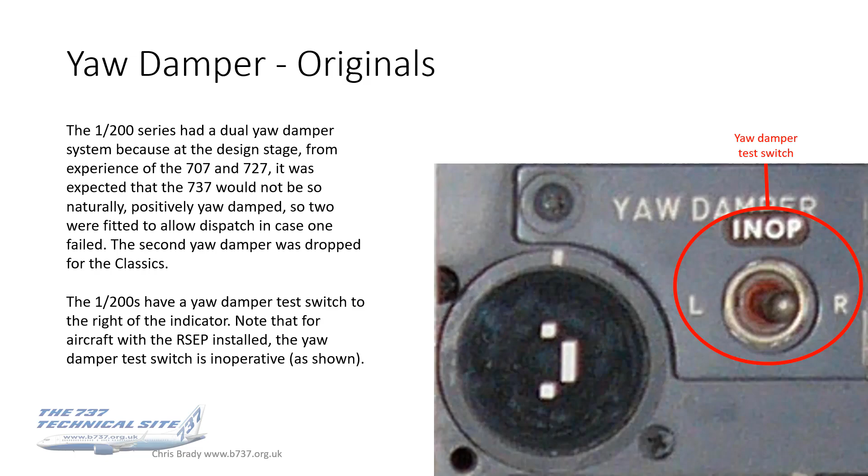Remember me talking about rudder balance earlier on in this presentation. It's a devil of a job to do - there's a whole manual on balancing a rudder, and the maths in it is extraordinary. So Boeing does a huge favour to operators and paints the rudder before they install it on the aircraft, so the balancing can be done accurately at the factory.

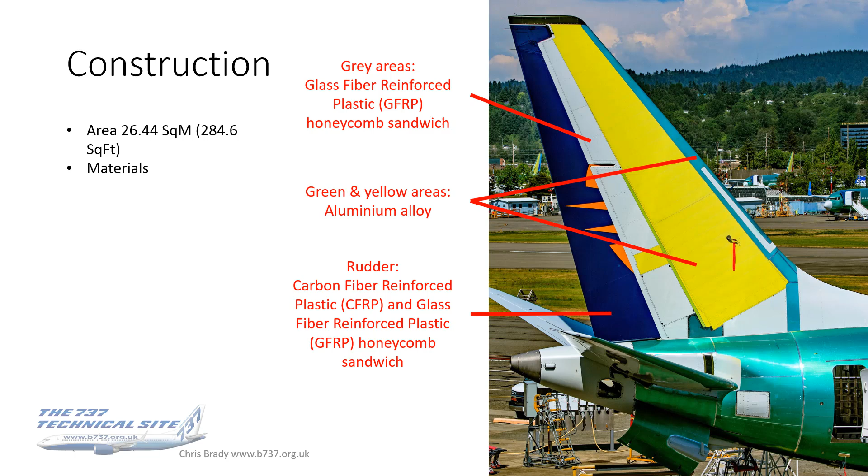Anyway, the rudder's made of a mixture of carbon fibre, CFRP, and glass fibre, GFRP, honeycomb sandwich. As I've already said, the rudder's pre-painted before assembly for ease of balancing, and that other oddity on the leading edge there, that's where the HF antenna lies, behind that composite area. I'll come on to mention the HF antenna in a moment, in a few slides.

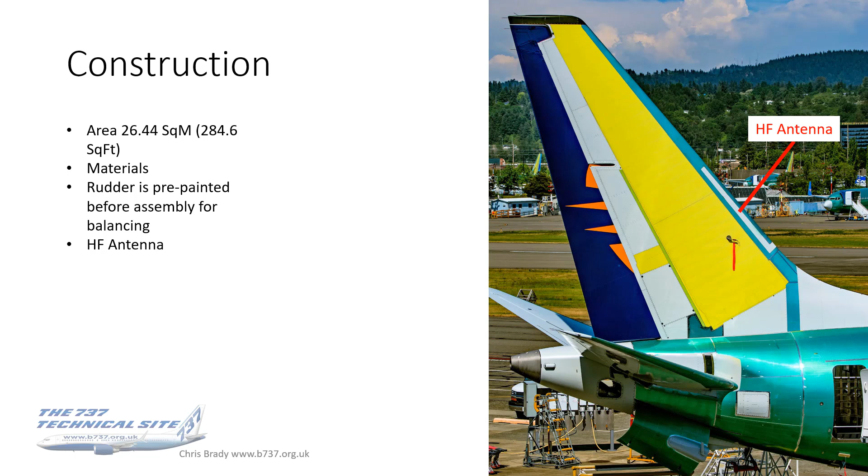The fin is, or can be, prone to icing at certain localized spots after long cold-soaked flights, and this pattern you'll see is quite a familiar one. The reason for that is that behind those points are the spars, the front and rear vertical stab spars, so obviously they have got more material behind them. It's not just the skin behind the panels at those points, and they absorb more cold over the hours of flight, and they can frost up when exposed to moisture.

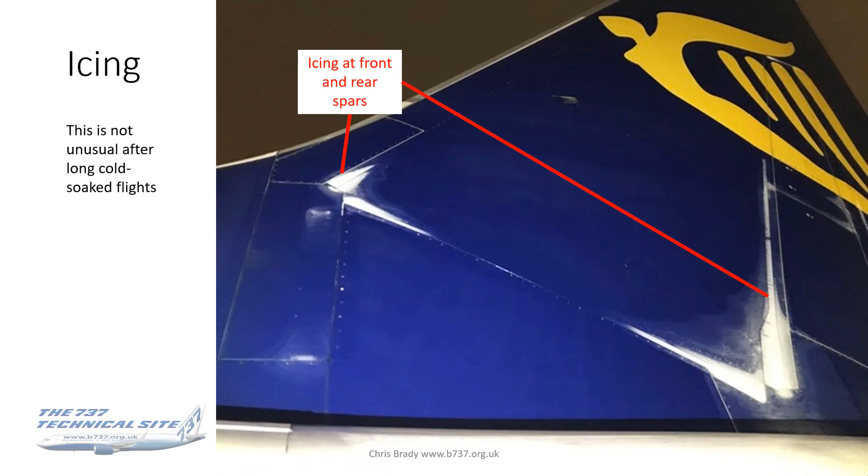The other place you can get frost is on the fillet panels, and slightly down there below the stab as well. Again, this is not unusual - perhaps a little more unusual than the previous frost picture, but it's there.

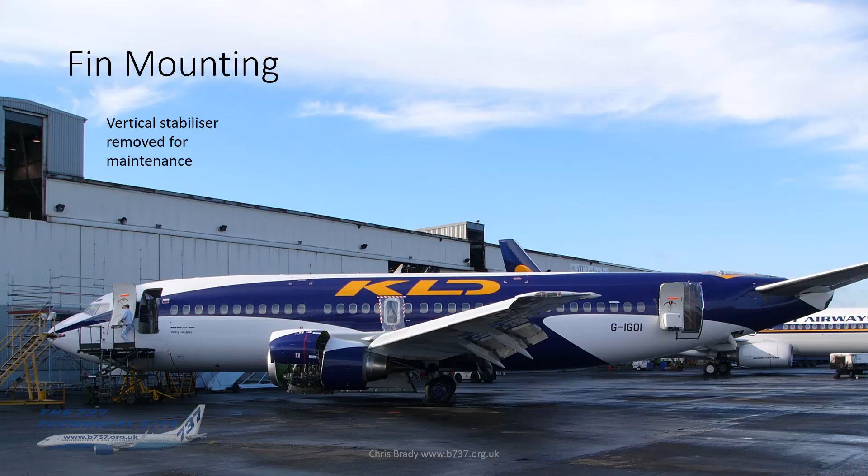This is a photo I took when I asked to see one of the next aircraft I'd be taking on a check flight, and the engineers took me out, and that's the sight I saw. Obviously it was a couple of weeks away from the flight I was going to do, but it did give me quite a surprise, because that was the first time I'd ever seen a 737 without its vertical stab. It really made me think, be even more careful than I already am before doing the yaw damper check and putting a rudder doublet into the rudder pedals.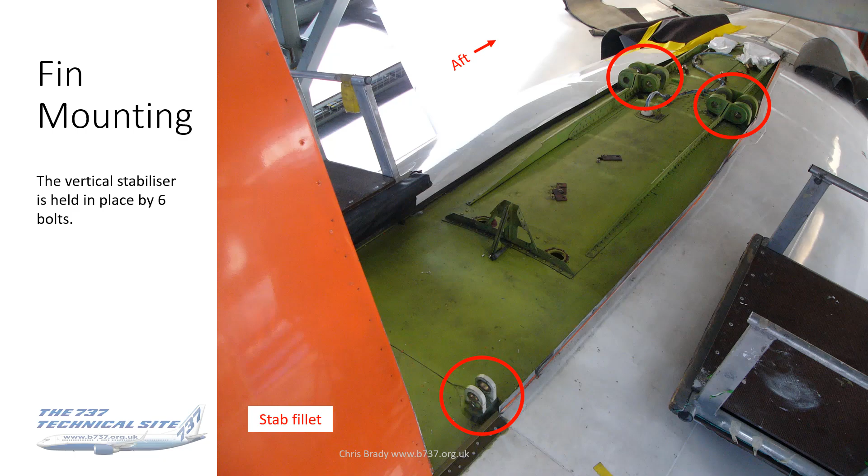So this is probably a picture worth bearing in mind before you're too heavy with the rudder in flight. I should say, I don't want to be overly dramatic about this - the rudder deflection is tested to, I think from memory, 1.5 times the stresses that we put it under in the normal flight envelope. So there is quite a margin there, but of course it can be overstressed, as the crew of the American A300 found.

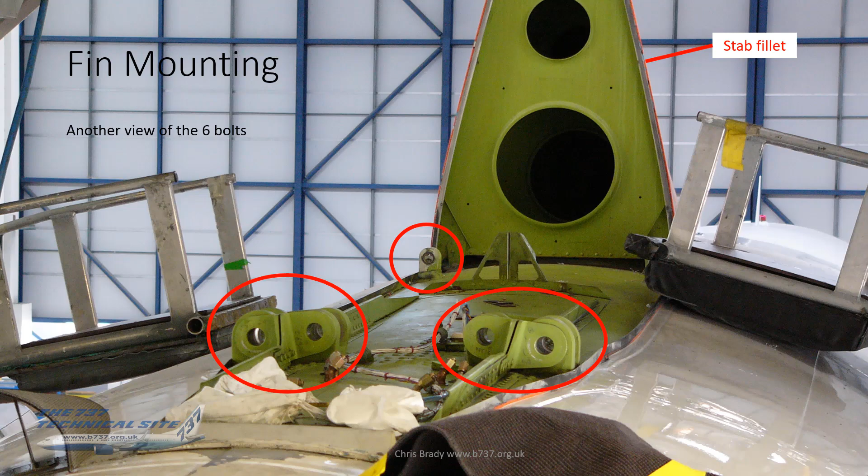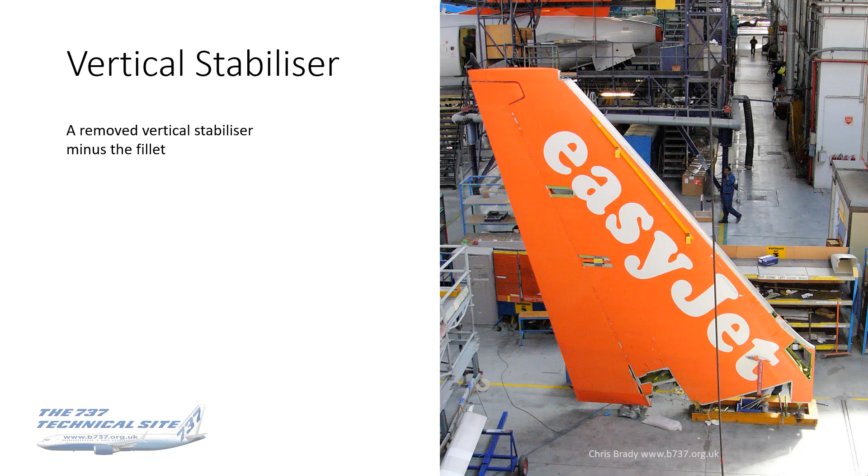This is just another view of the exact same thing, just showing the bolts from a different direction, so just to kind of put it all in context. That's a vertical stab, just sat there on the ground on the hangar floor, minus the fillet at the front of it. Again, I just throw these in - there's no great technical insight here. These are sights that we as pilots very rarely get to see, and I found them of interest, and I pass them on to you. Hopefully you find them of interest as well.

These are not my words, this is pulled verbatim from a NASA website. It says the vertical stabilizer often employs a small fillet or dorsal fin at its forward base, which helps to increase the stall angle of the vertical surface thanks to vortex lift, and to prevent a phenomenon called rudder lock or rudder reversal. Rudder lock occurs when the force on a deflected rudder in a steady side slip suddenly reverses as the vertical stab stalls.

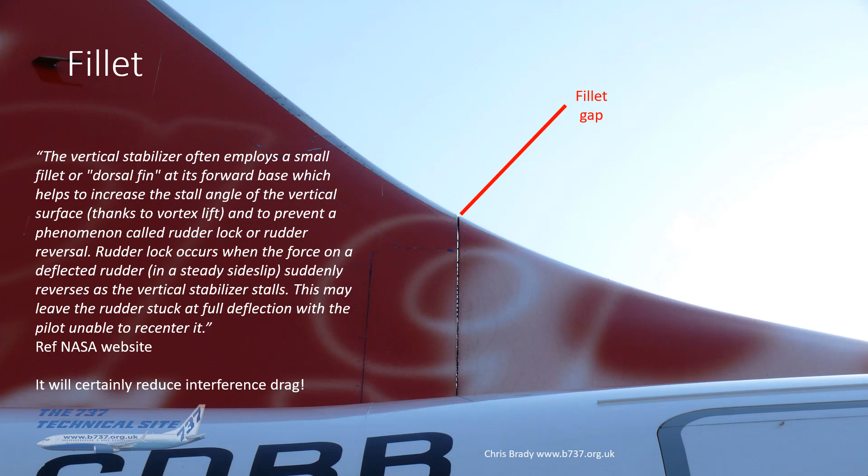Anyway, I'm always very, very thankful to anybody, an FO, a member of ground staff, or even cabin crew, anybody that points out anything on my aircraft that they're concerned about. I want to hear about it, and then I can investigate it. And to that end, if any member of ground crew tells you this, even if the passengers are on, even if the doors are closed, you're kind of duty bound to go and have a look.

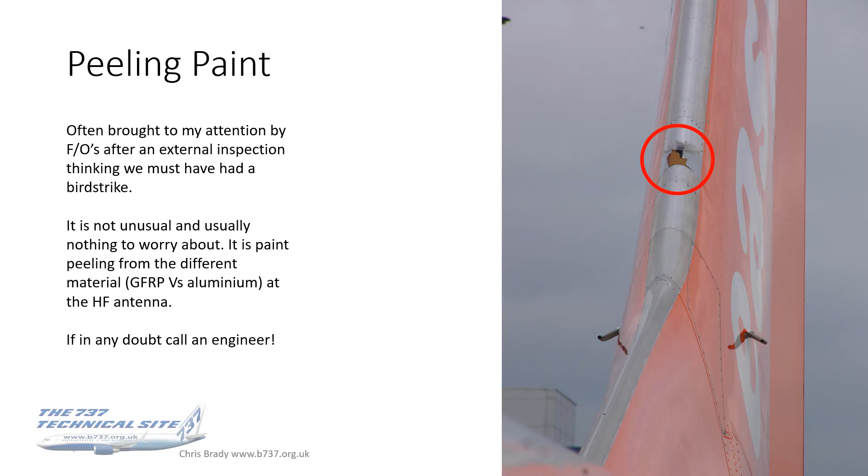That's it. That's all I know about the yaw systems on the 737.